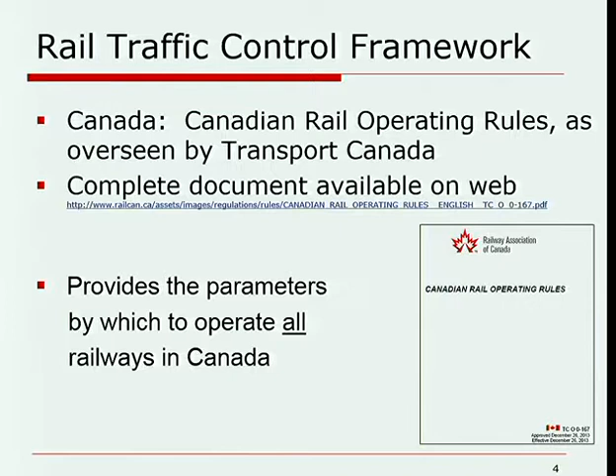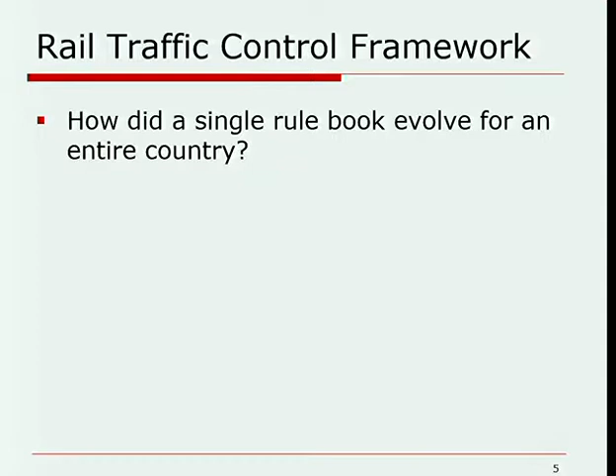So in the U.S., of course, things are very different. So you might be asking, well, how on earth did we ever get to the point where we were organized enough to have a single rule book for an entire country? And that's a valid question.

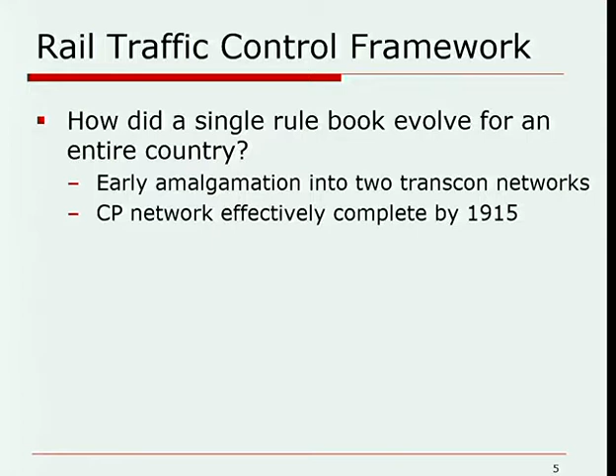And a lot of it is rooted in history, because in Canada, we had a very early amalgamation into two major railroad companies and an assortment of very small associated, well, we would call them short lines today. So we had two transcontinental networks very early in the 20th century. The CP network, the Canadian Pacific, was basically complete by 1915. The CN was created from various bankrupt railroads by the government in 1924.

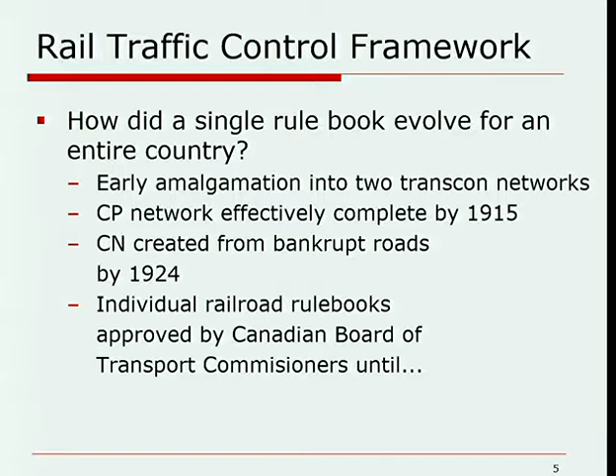At that stage, there were individual railway rule books, but they were all approved by government, the Government of Canada, through the Board of Transport Commissioners. Until 1962, when we had our first rule book that incorporated everything for all railroad companies, and they were actually even listed on the first page behind the title page.

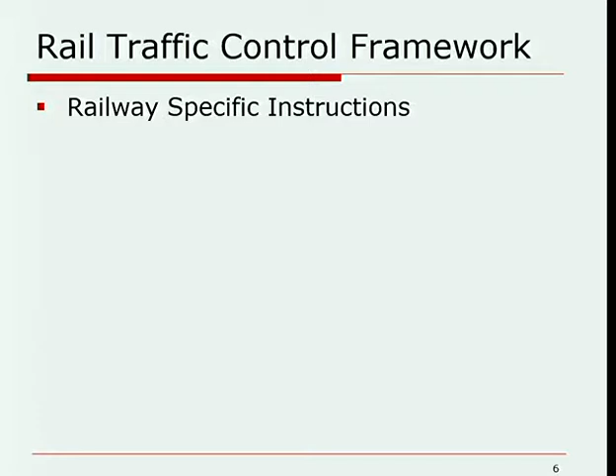So in 1962, the Uniform Code of Operating Rules basically condensed everybody's rule book, which at that point basically all looked the same anyways, into this one document. And it has since evolved from that time, changed names in the 1990s to the Canadian Rail Operating Rules. We do, however, have the provision to do railway-specific instructions above and beyond the rule book.

For example, at CN, we have our document, which is Canadian Rail Operating Rules, and that's the title page from it, but within that rule book, anything that we have added as special instruction makes a rule even more restrictive. We can make things more restrictive. We can't make them less restrictive.

But in the CN rule book version, we have it in blue text to specifically highlight where there's different areas. This company-tailored rule book also excludes rules that do not apply on certain railroads' territories. For example, in CN, we have no automatic block signal territory anymore, so we don't include that in our rule book.

Yes, Dr. Barkett. Could you go back to the previous slide for a second? And if you're going to get to this later, just hold off. But I think what you just said was that the Uniform Code of Operating Rules was adopted in 1962, largely derived from the two big transcon railroads. Yeah. But you also said they were essentially the same anyway. Why were they? Because the analogy in the United States would be that we don't have two different big railroads with identical rule books. So there must have been something between '24 and '62 that led them to converge.

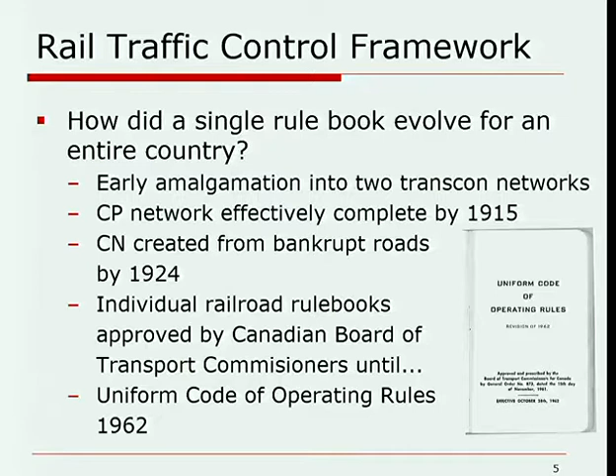So, back to railway-specific instructions: the company-tailored rule book, and, of course, our timetable, which includes other specific instructions for operation on any particular line of track that's out there, plus other special instructions that may apply only to a certain territory. In Canada, every mainline segment of track is referred to as a subdivision. And then there's also reference to yards and terminals. The timetable also clearly identifies the method of control and who oversees the application of those control rules.

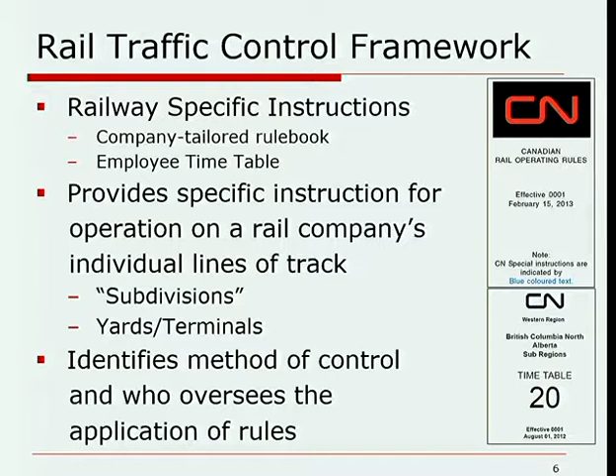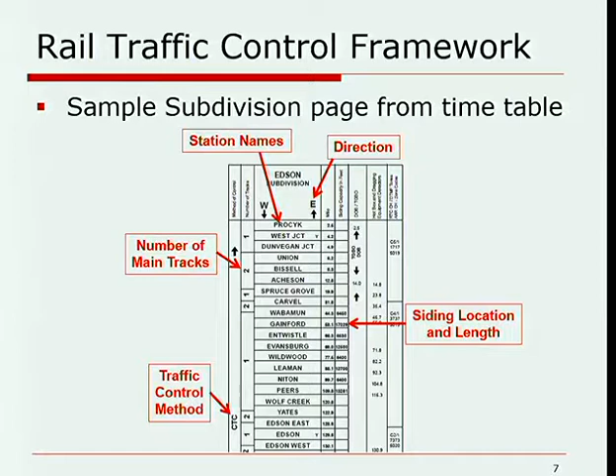And of course, it specifically identifies the number of main tracks in service between station locations, and siding location and length associated with the station name. When we say siding here, these are timetable designated sidings that are used for passing and meeting of trains. And they have to be associated with a station name in order to execute proper control.

So we'll take a bit of a step back here. We'll start out with our basic control systems for non-main track.

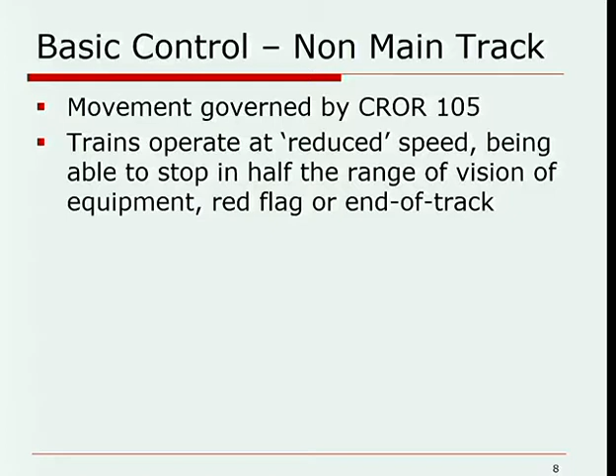Effectively, there is no control rule. What happens in Canada is movement and speed is governed by Rule 105. And in this territory, trains will operate at reduced speed. They have to stop within half the range of vision of equipment, or a red flag, or the end of track, obviously. Typical yard operation there, non-main track situation.

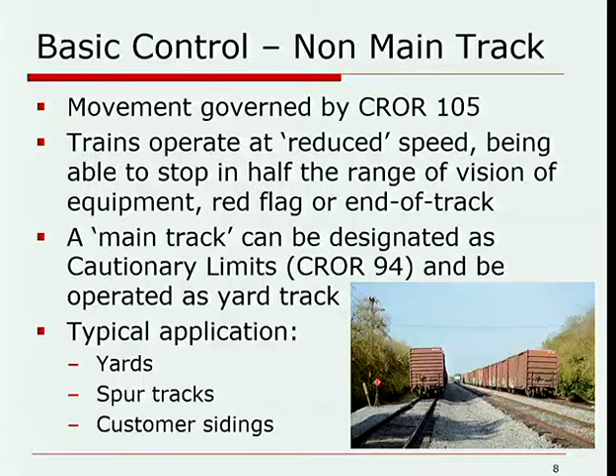There are a couple of provisions where you can designate a main track as being not under RTC control, RTC being rail traffic control, the person who oversees the operation. There's two ways of doing it. One of them is to install what we call cautionary limits, which is prescribed by Rule 94. It basically just turns the main track into a yard track. And a typical application, like I said, yards, all our spur tracks and customer sidings, ancillary tracks would all be operated under Rule 105.

In Canada, we have very specific rules about how to identify what is non-main track territory. The quickest way, besides knowing your territory: all our switch targets, when lined in the reverse position, will have a yellow target displayed. And it used to be a prescribed shape as well, but things have evolved and that's gotten a little looser over time. Here, this is a photograph on the Arnaud Railway where they use a yellow chevron there to sort of indicate you're going to the left at this particular turnout. But the yellow target is a clear indication that you're not on a main track.

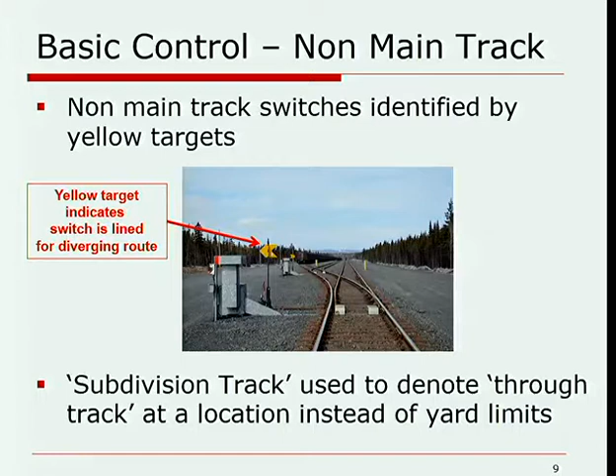On CN, we use what we call Subdivision Track to designate what is the through track at a particular station instead of using a yard limit or a cautionary limit application. And that will show up in the timetable as well. As I said before, the rail traffic controller, who we almost always call the RTC, he or she supervises and directs all traffic, issues all authorities, pushes all the buttons, makes things happen.

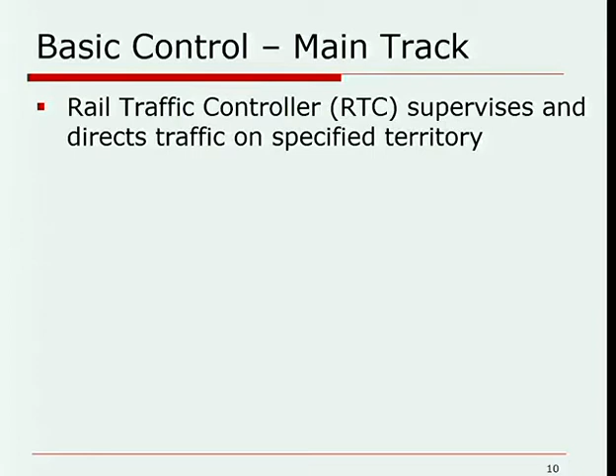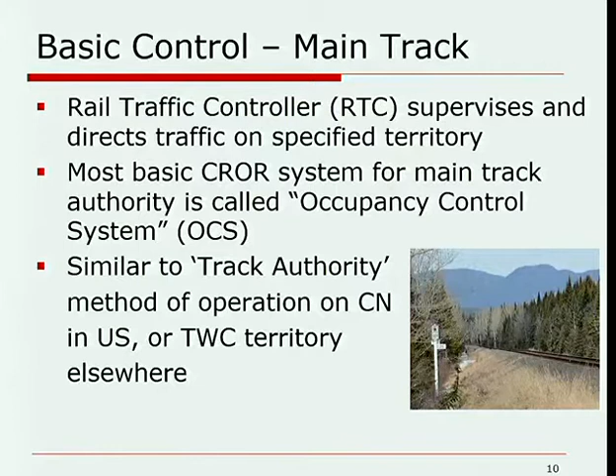It's a very flexible system. It doesn't require specific blocks. You can use whatever length of track you need in order to execute whatever movement you want. You're not giving out, like a direct traffic control system, specified blocks.

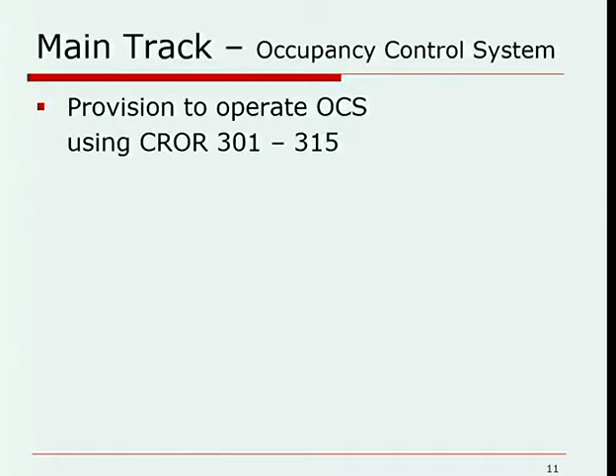OCS is governed by rules 301 to 315, and we have a nice pad that everyone is issued, and if you're a CN employee, you can actually pull it off the Operating Practices website and print as many as you want. This is the formal operating document that gets filled in to occupy the main track, do work, or move somewhere.

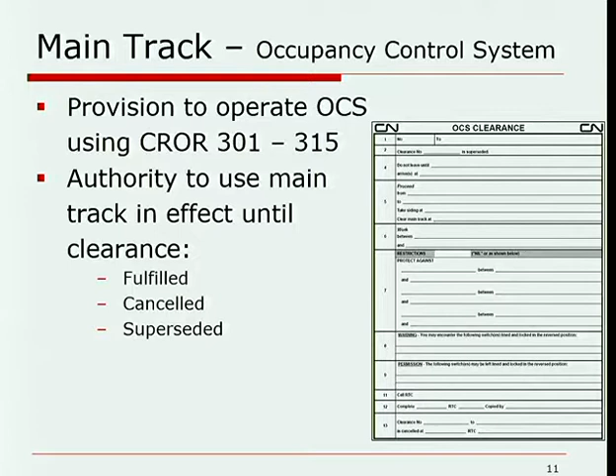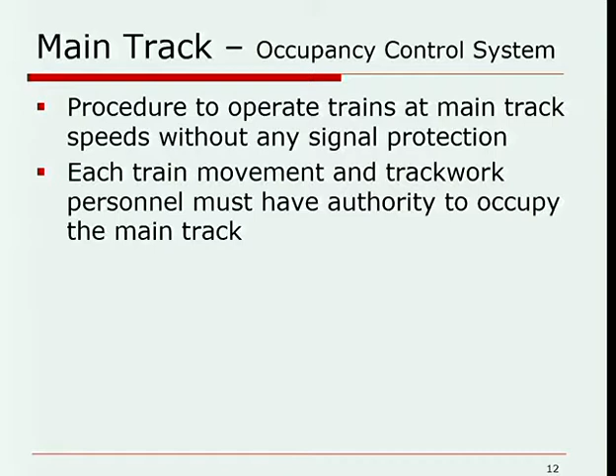We call it a clearance, and the authority to use that clearance is in effect until what we call fulfilled, which means you get to your final terminal and have exited the main line, it's canceled somewhere en route, you clear up onto a track that's not the main track, or it is superseded by some new clearance to move elsewhere. It's our procedure that we can use to operate at main track speeds without signal protection. And before anyone can go out there, obviously they need to copy a clearance and have authority to occupy.

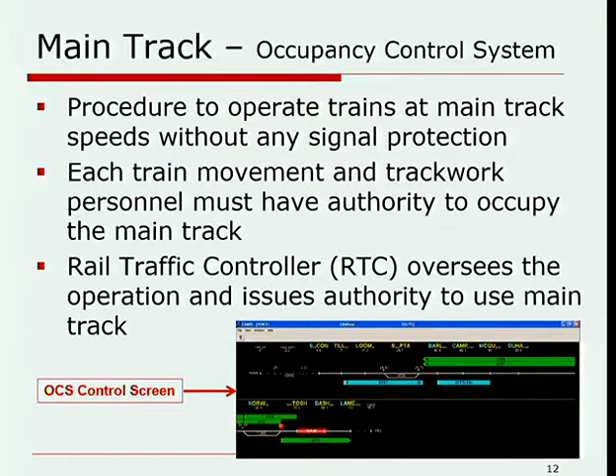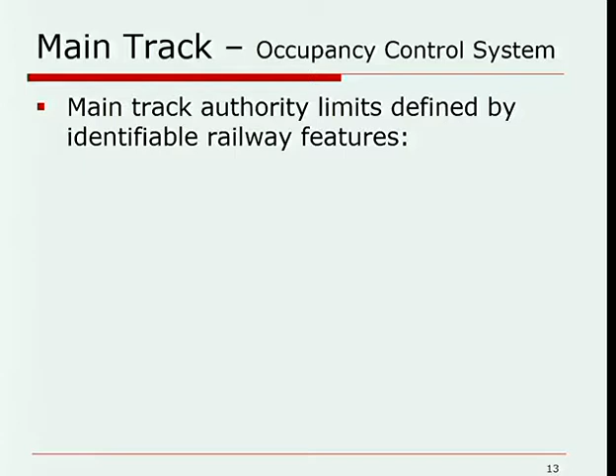In terms of the OCS system, in order to identify where you can go from and to, the limits are strictly defined by identifiable features. Besides the station name signs, we'll get to that in a moment, one of the key ones is we can use mileposts.

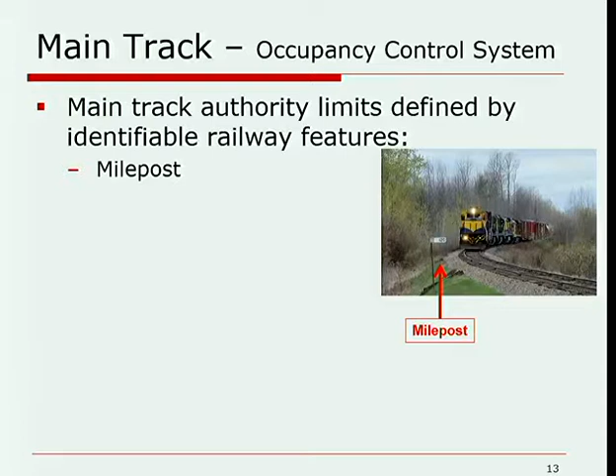Obviously, they better be pretty prominent and easy to see by the train crew. They can't be some mile marker that's hanging off a tree or something like that. Station sign is also very common. It has to be very prominent. Most of them are posted right next to the track, like in that photo there. We also use marked turnouts, ends of sidings, junction switches, etc., to designate limits of authority as well.

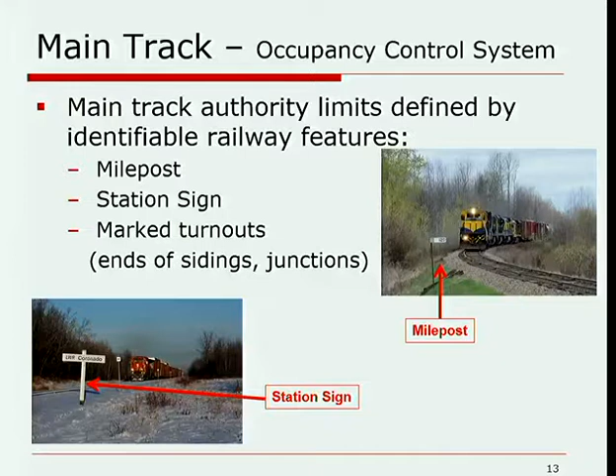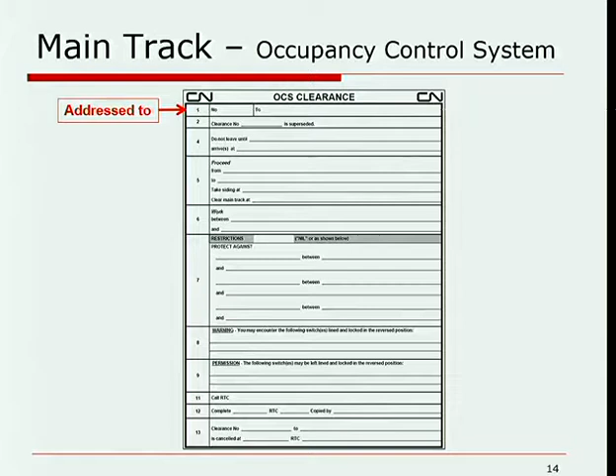So just a quick breeze through here of what the OCS clearance pad has on it. It has an address section, obviously, to give direction to who's allowed to go out on the track. There's a box for instructions to wait at a point, if necessary, before executing the instruction to proceed.

There's a box in here that specifically designates what direction you may operate in, and that authority gives you direction to move from and to in a single direction only, with a couple of little minor exceptions, but this only allows for movement in one direction. There's also the provision for bidirectional authority by using a work authority, and you can move back and forth at will once you have that.

Then there's information about other authorities that may be in effect within your limits. We do allow you authorization through, say, working limits, but you have to have information who to contact to get through those working limits for obvious reasons.

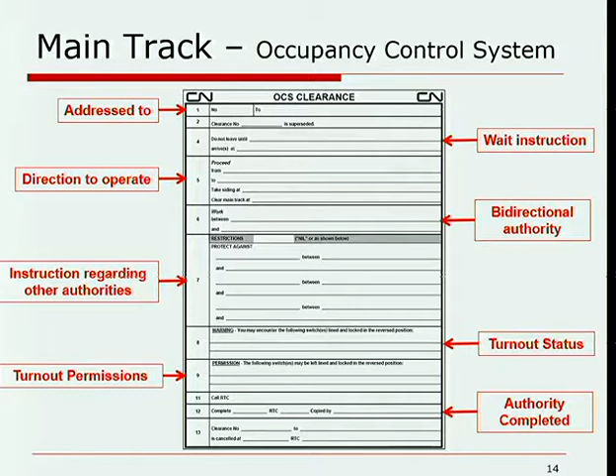Information concerning turnouts that may have been left in the reverse position because of other movements. We do allow in Canada turnouts to be left in reverse position as long as authority has been granted by the rail traffic controller. And that is granted by the next box down below here. And then finally, once the authority has been copied and repeated correctly, it is completed with the boxes at the bottom. And then there's provision to cancel the authority if it's no longer needed anymore.

Turnouts in OCS territory are generally always manually operated. There's a few instances out there where we have push button or radio control, such as this location in the photo on the Arnaud Railway, and they look a little bit more high-tech than just a regular switch stand.

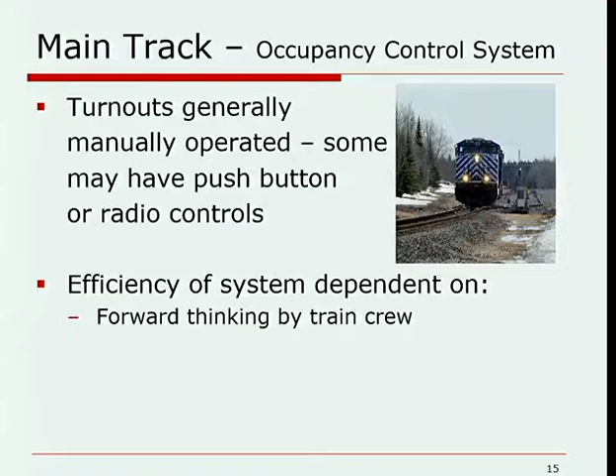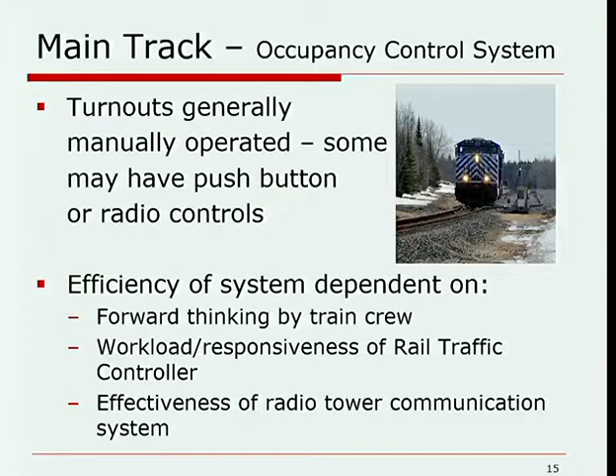And much like written authority systems in the U.S., the efficiency of our OCS is totally dependent on forward thinking by a train crew or the RTC to get manual authorities in time to keep moving. The workload and responsiveness of the RTC, that's fairly obvious. And the effectiveness of radio tower communication. At this point in time, once a train gets out of a terminal, the only way they have to communicate with the RTC is via radio. They don't have a data radio system or anything to electronically distribute clearances yet.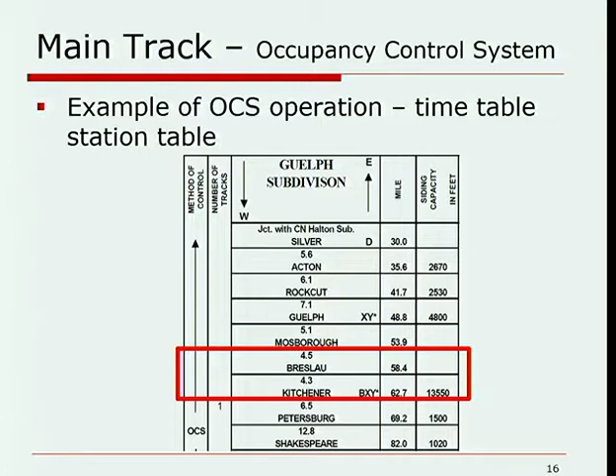So just a quick example of an OCS operation is a subdivision that used to be part of the CN network in Ontario. This would be what you would see on an OCS subdivision page. OCS clearly marked as the method of control on the left there, and I'm just going to show you how this would look on a track plan here using the segment of track between these two locations, Breslau and Kitchener, which used to be right down the street from where I went to university.

I didn't point it out before on the previous slide, but Kitchener has a designated passing siding, and it showed in the timetable 13,550 feet. And that's a place where you can direct trains to take or leave siding for meet purposes. The track at Breslau, although it looks like a siding, did not have a siding measurement shown in the timetable. And as such, it's just considered to be an other track, non-main track.

And it isn't something that you can use in an authority necessarily to use for a meet or pass location, although there are ways of using it for other things. But that track does not need to be kept clear of equipment or anything, unlike the designated siding.

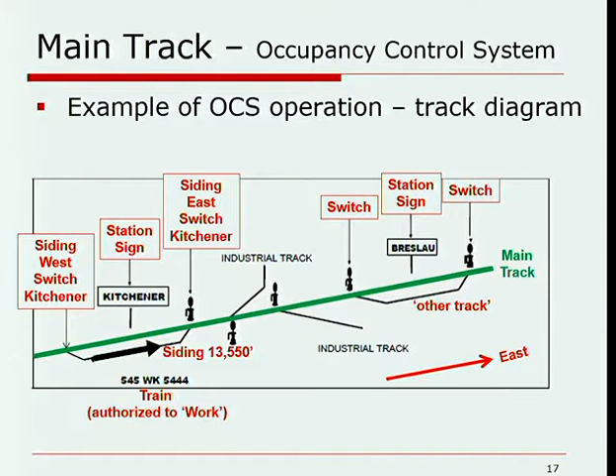And the little train showing the black arrow in the siding, the way it's been written there, 545 WK, which means work. 5444 is a train that would have some authority to work by OCS clearance. And that's basically how an OCS segment of track would look in plan view, and what you could use to dispatch it. Now we'll move on to signal overlay.

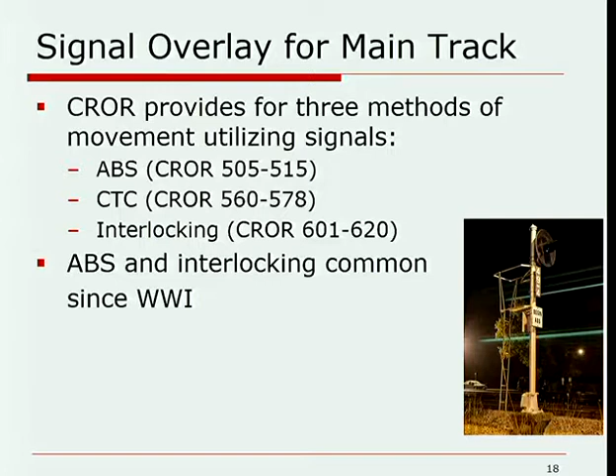In the Canadian operating rules, we've got three main methods for controlling movement using signals, and that's automatic block signals, which is rules 505 to 515, and CTC, of course, which is much more popular, which is rules 560 to 578, and then interlocking for more complicated or movable bridge type situations with their own set of rules. In Canada, ABS and interlocking, much like in the United States, basically evolved over the same period, starting from around World War I or so. CTC first came to Canada in the early 1920s, but the real significant installations didn't show up until the World War II era.

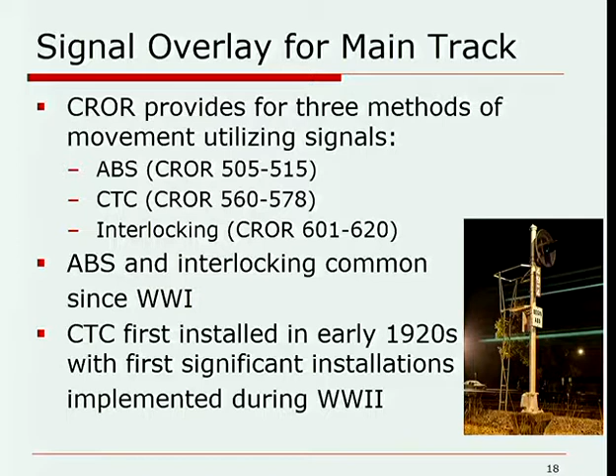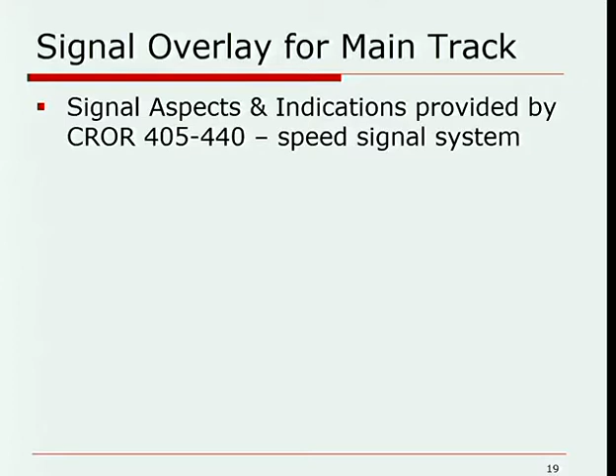On the main track, under any of those signalized methods of control, the signal aspects and indications are provided by another very specific set of rules. And this is kind of a big difference between Canada and the US. We use only one set of signal rules, aspects and indications. And they're all there in that chart. It's based on the speed signaling system. So everything, except for things such as the clear signal, which means proceed, and the stop signal, which means stop, and restricting, the rest of them, the definition all circulates around speed. It's a speed to another speed. And we use a combination of colors to convey that information.

In Canada, we also use a number of letter markers on the signal mast in order to upgrade certain indications. For example, limited speed signal indications can be developed by applying an L marker on the mast to a signal that displays medium speed indications. So a medium to clear indication could be upgraded to a limited to clear simply by the application of the letter L plate on the signal mast.

Question? Yes, there are. It is maybe difficult to see, but there are flashing indications there. It's a little bit difficult to see on the overhead here, but they are there.

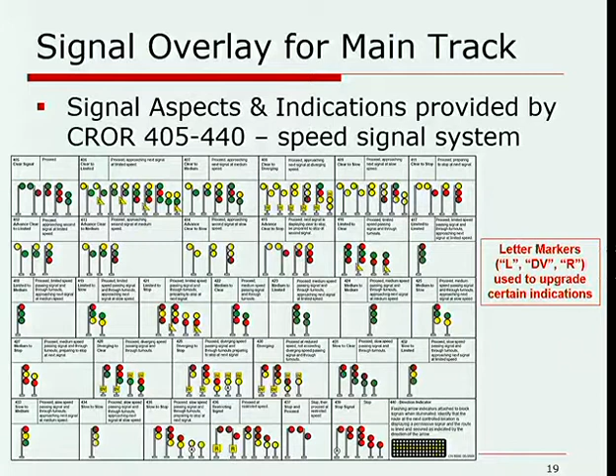And then in Canada, we also have a very interesting little device, Rule 440, down in the bottom right-hand corner, which is the direction indicator, which we use in certain applications approaching sidings where the siding is not under full CTC control, and that provides advance information to the train crew approaching that siding location that the route is lined into the siding, rather than coming up to the next signal prepared to stop, especially if it's a restricting signal application going into that siding.

Automatic block signals, like I said earlier, at CN we have basically eliminated the use of ABS. CP still has some significant segments of ABS on their territory: Western Canada between Edmonton and Red Deer, and then in Eastern Canada and Southern Ontario, west of Toronto, north of Toronto, and a double track operation going from Smiths Falls towards Montreal in the east. And there's really nothing new there. The application is basically identical to what has always been used in the United States.

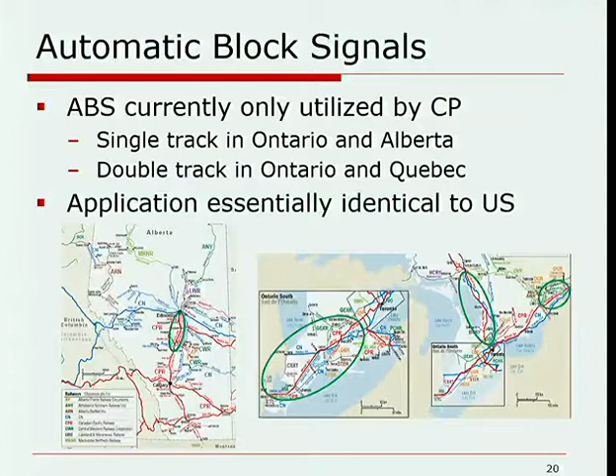Rules 505 to 515 govern its usage. And it is used in conjunction with the OCS rules. The ABS, of course, only provides information concerning broken rail protection and following and head-on train protection. OCS is your authority to actually occupy the main track and move somewhere.

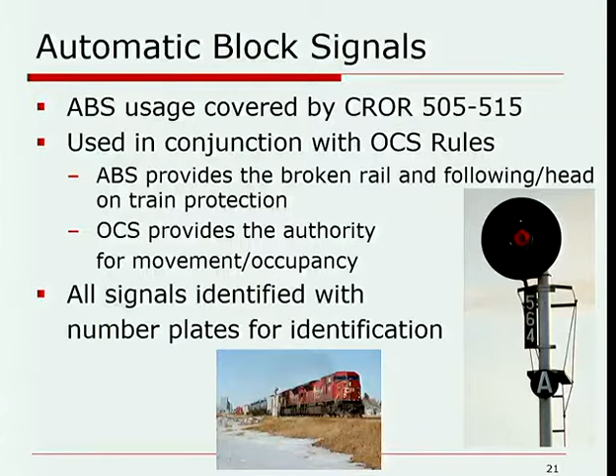And in ABS territory, regardless of signal type, all signals are identified with number plates specifically for identification purposes in documentation, including the absolute signals at the end of a siding location that govern the movement to the next station, which is different than in the United States application.

CTC in Canada, basically we followed the experiences of the United States roads and started getting into CTC from the 1920s onward. CP put the first real substantial installation into service out in Medicine Hat, Alberta, and it governed movements on a 6-mile, 1% hill that had helper operation and had a lot of back and forth movement, and which previously had been dispatched using an electric staff type system.

And basically, just a familiar story, they needed more capacity, and they needed to get something that was more robust to move more trains over this segment of track. And all it included was a select number of controlled signals at either station and 2 power turnouts.

CN was the first railroad to commission a long-distance single-track CTC application between Moncton and Halifax in eastern Canada. And basically that was installed to help with the efforts during World War II because we had a severe problem with trying to get ships out of the harbors at Montreal and Quebec City. German U-boats were actually coming into the St. Lawrence River and torpedoing ships. So Halifax was a much more easily defendable harbor area.

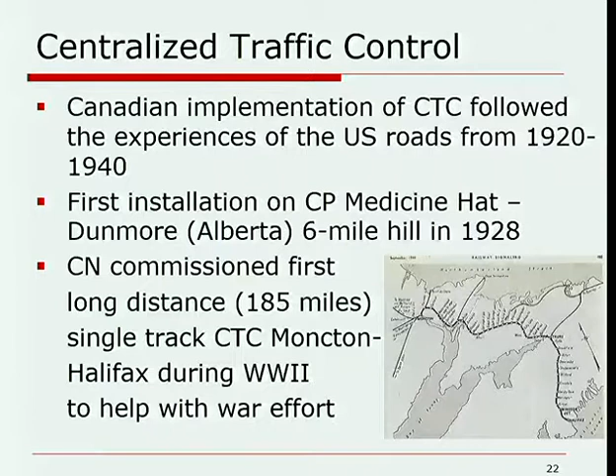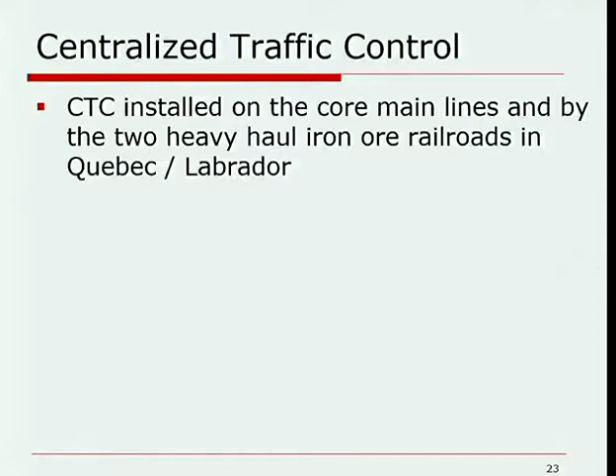In Canada, based on the success of that application, through the 1950s and in the 1960s, CTC was basically installed very rapidly on all the core main lines in Canada, and the two heavy iron ore railroads that opened up in the late 1950s in Quebec and Labrador in eastern Canada.

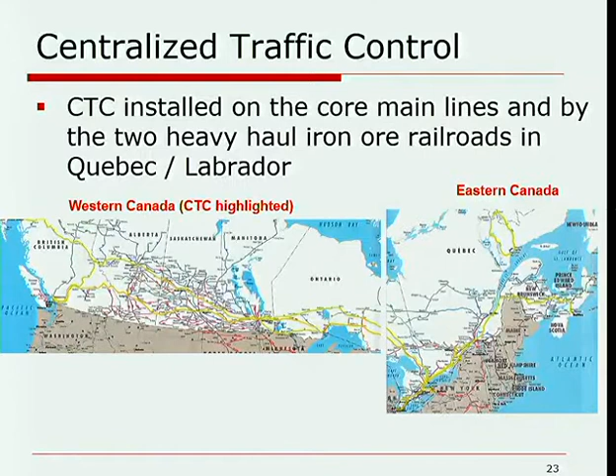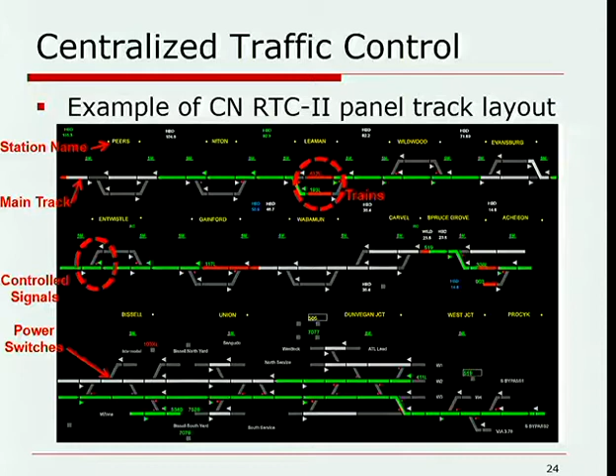Anything that's shown in here as what looks like a switch is a switch that can be controlled by the RTC and would have a power or dual control switch machine. And then the trains basically show up as your red lines as track occupancies. Nothing really fantastic or much different than US displays.

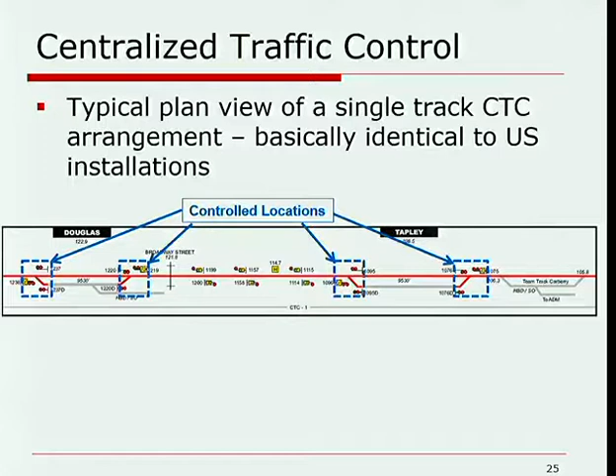Track plan view of a single track CTC operation. This would be a segment on CP main line. It's basically identical to US installations today. Historically, there were a couple of little differences, but over the last 20 to 30 years, basically everything has started to look effectively identical, with a series of controlled locations marking the ends of siding locations, and then the application of intermediate signals in between.

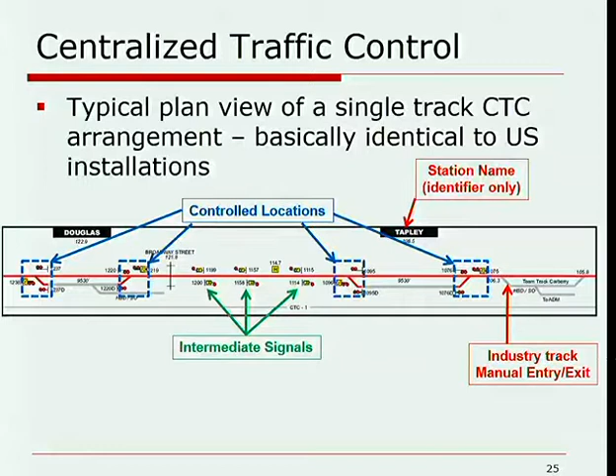And the station names are not quite as important in CTC as they are in OCS. They don't really convey specific operating authority. That's what the controlled signals are used to designate, not the station names. Station names are used as identification for signal features that are out there in the field. And then industry track, of course, would be back under what we discussed earlier, under Rule 105 authority.

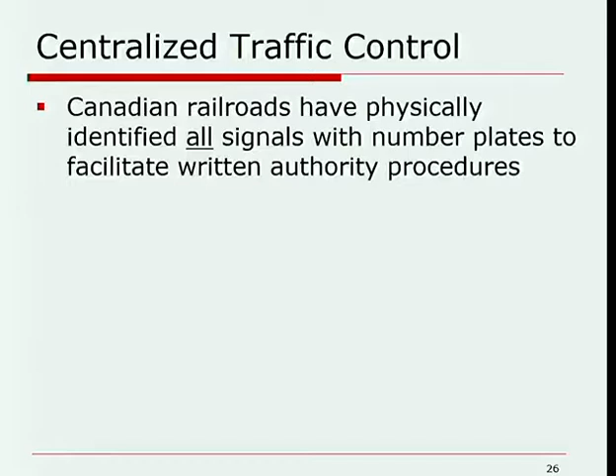And back to something that I talked about when we were discussing ABS. We have identified all of our signals in CTC with number plates, and that's to facilitate written authority procedures. This is a photograph of a location on the Quebec North Shore Labrador Railway with 3 controlled signals and 1 dual control switch. And the arrows there point to the 3 controlled signals. And you'll see that each one of them has a number plate on it.

And when a written authority is required to pass a signal at stop or to give maintenance-of-way authority between 2 locations, they use these number designations as that limit of authority instead of going through a big, long discussion and trying to describe what that location is.

Dr. Barkin. So I take it these are absolute signals. Yes, they are. So is there some other means by which a crew member knows or can distinguish between absolute and permissive signals? I mean, as you know, of course, in typical U.S., these would not have a number plate. Yeah, the difference in Canada, first off, anything that is a single head signal is a permissive signal. We have no absolute signals with only one signal head, unless it has an A marker on it. So that's one thing. Okay.

And then the second one is if we need an absolute signal or intermediate signal that needs two heads to display something, they are staggered, one on either side of the signal mast. So you get kind of a diagonal effect when you look at it. So even if they're color lights, they'll be staggered. Yes, they will be. Gotcha. And that's all demonstrated and shown in the signal aspect chart.

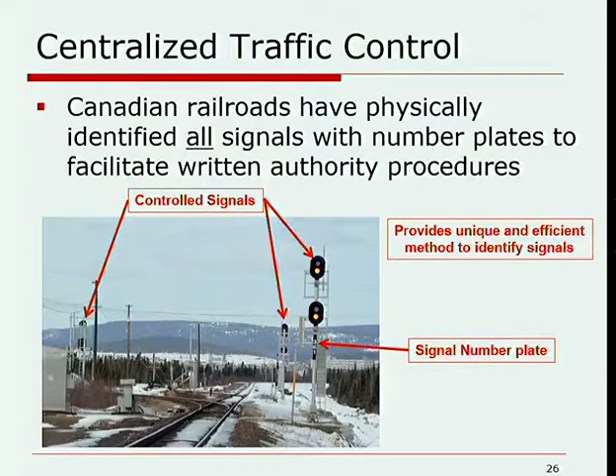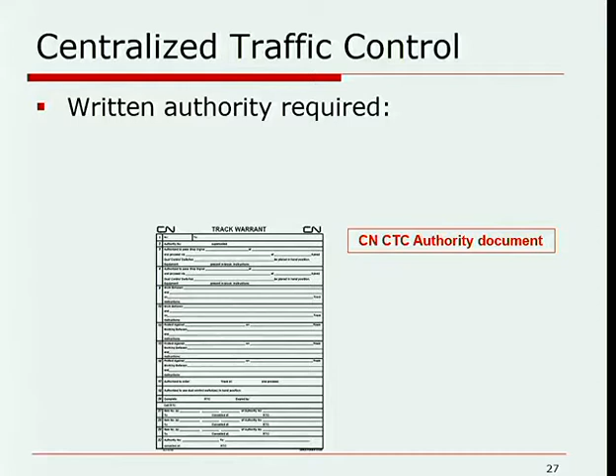Just like in OCS, every train crew has to carry around, and every engineering work group has to carry around a written authority pad. In CN, we call it the track warrant, which is interesting considering what track warrant means in the United States. It used to be called CTC authority form. This document is used by a rail traffic controller to give information to a train crew, for example, to pass a control signal that's displaying stop and cannot be cleared for some particular reason. That's governed very specifically by Rule 564.

This document can also be used to allow engineering forces or train crews to work between defined signals and take switches off power and operate them in hand throw as they see fit to do whatever they need to do. And this document is also used for permission to enter the main track from a hand-operated switch. It's a little bit different in Canada. We don't necessarily need an entering signal or an electric lock on every hand-throw turnout in CTC territory because of this provision that we use written authority to enter main track at hand-operated switches.

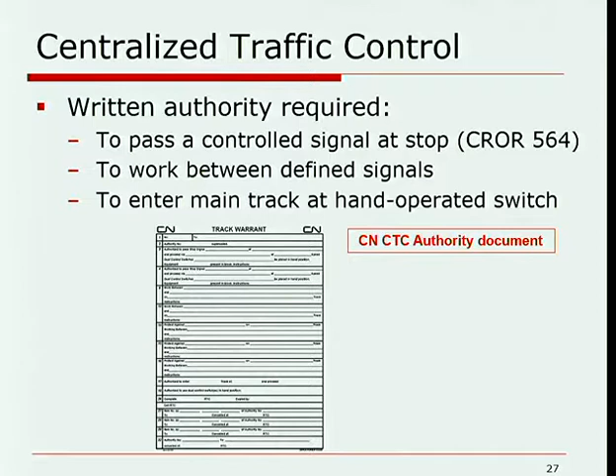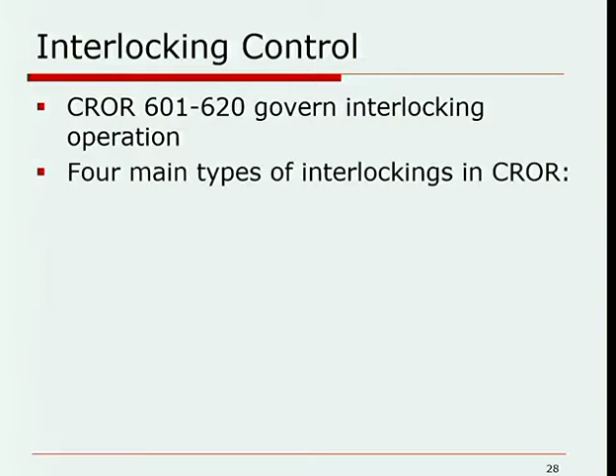Moving along, the next big group of control would be interlocking. And in Canada, that's under Rule 601 to 620. And we have four main types in Canada that are specifically identified in the rule book, and instructions are specifically written out about how to deal with each one of these. There's what they call a manual interlocking, and that does not mean a place where there's gates or stop signs. This is in there more as a placeholder right now, for a form of interlocking that we haven't thought about yet and may want to introduce. And it would only be governed by special instructions developed by the railroad and approved by Transport Canada.

But the other three are typical to what you would see even in the United States. The locally controlled style of interlocking, which means there's a tower nearby. Remotely controlled, which would mean the rail traffic controller from a remote location operates it. And then automatic, which is usually nowadays restricted to just simple diamond crossing locations.

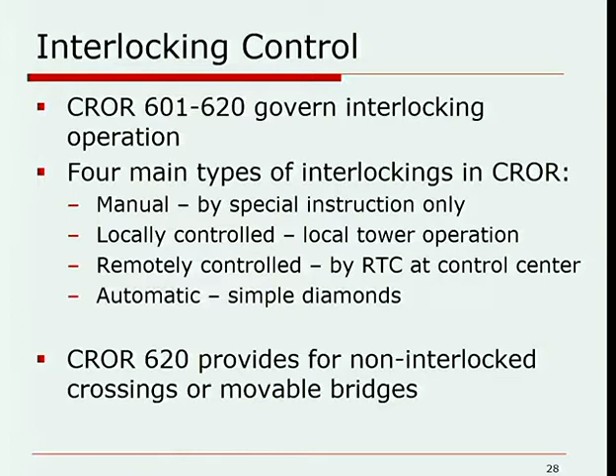Also governed under interlocking would be things like movable bridges. It doesn't necessarily mean that this is a diamond location or a major terminal. There's also a very specific rule. It's interesting that it falls under interlocking. But we have an interlocking rule for what we call non-interlocked crossings and movable bridges, which would be stop sign or gate or something like that.

In Canada, we've seen quite an evolution in interlocking control, very rapidly have moved away from the classical definition of the interlocking with the control tower and diamonds like this photo from around 1923 at West Toronto. At that time, it was locally controlled. By the time this particular location was retired just last year, it had been completely remoted and totally under the control of the Canadian Pacific RTC from various places, Toronto, Montreal, and then eventually Calgary, before it was retired and replaced by a fly-under for a new GO Transit project.

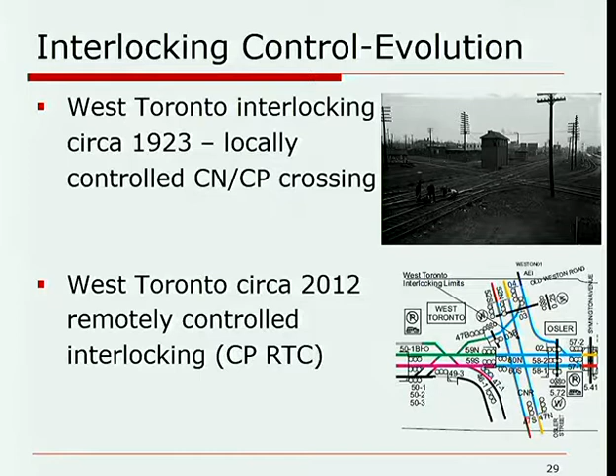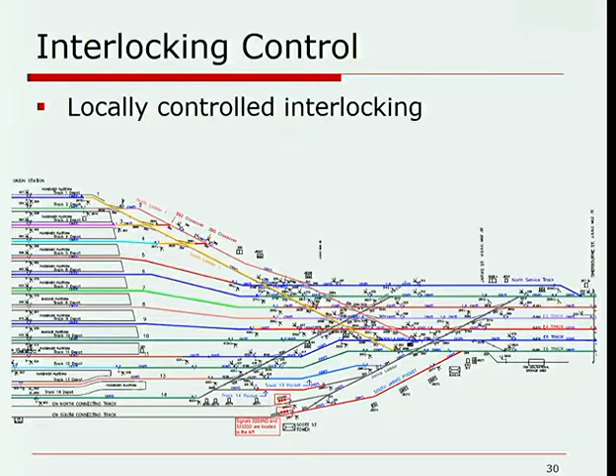But again, evolution in Canada has been much more rapid to eliminate the locally controlled locations than it has been in the United States. We're down to only a handful in the entire country, and basically most of those are in Toronto. This is one of the last ones here. This is a sample of the track diagram for Scott Street Tower, which is on the east side of Union Station in Toronto.

Anyone hazard a guess on just how many levers and controls? And Mr. Roma, you're not allowed to answer this one. I was going to say a lot. A lot? 120 from someone? They're very close, actually.

Well, this particular location was opened with the complete rebuild of the Toronto Union Station area. Opened in 1931 with 78 signal levers, 84 switch levers, and 192 levers in total. The length of this room, probably. Pretty much.

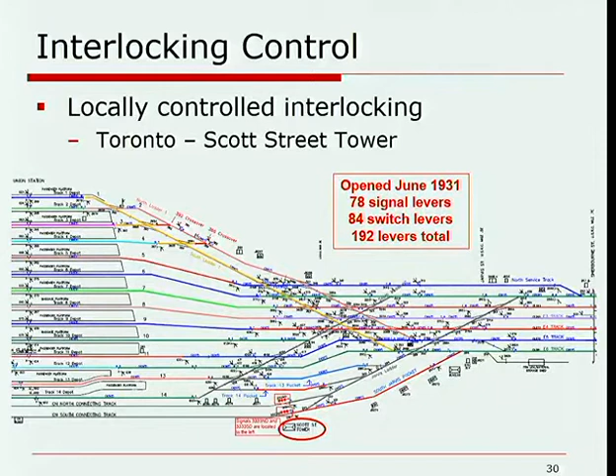However, even this location, and there's two others nearby in Toronto governing the Union Station Rail Corridor, are under plan right now to be eliminated by what we would now call a remotely controlled interlocking system as part of the GO Transit and Metrolinx expansion plans for the Union Station area. Yeah, the question was whether that project will rationalize or just transfer control. And in fact, if anything, there'll be even more track once they're finished there than there is now. But yeah, for the moment, the main thing is to transfer control to a more modern control system.

Future control systems are provided for in Canada, specifically in the CROR. There's a segment in the rule book that provides for what we call a special control system. And there's three little rules in the rule book, 351 to 353, which basically says they'll be governed by special instructions once we figure out what that's going to be. It may seem kind of ridiculous, but actually this little group of three rules has been in effect in various rule books since the UCOR in order to implement various new methods of control as they are developed and come into practice. And in fact, our occupancy control system, which at one time was called manual block system, was implemented using these three little rules roughly 40 years ago.

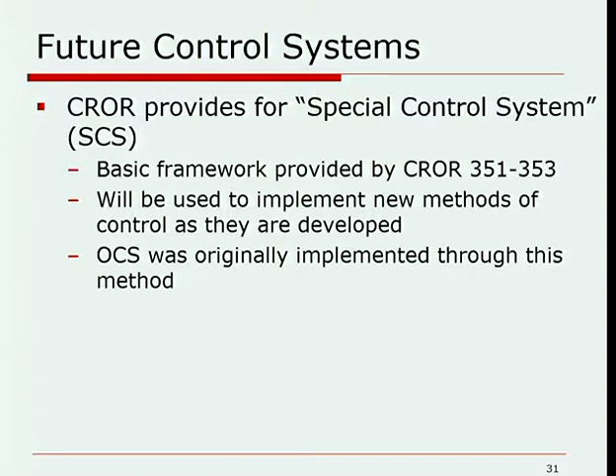So we do have in print at least a way to incorporate and start work on whatever our next control system is going to be going forward, which right now does not look to be PTC. There's currently in Canada no specific mandate or requirement to implement PTC, unlike in the United States. We've taken a bit of a wait and see methodology to see what happens with the United States application. And although there's been some incidents where the subject has come up, so far nobody has legislated any kind of rulings or mandates that say you must do this by X date.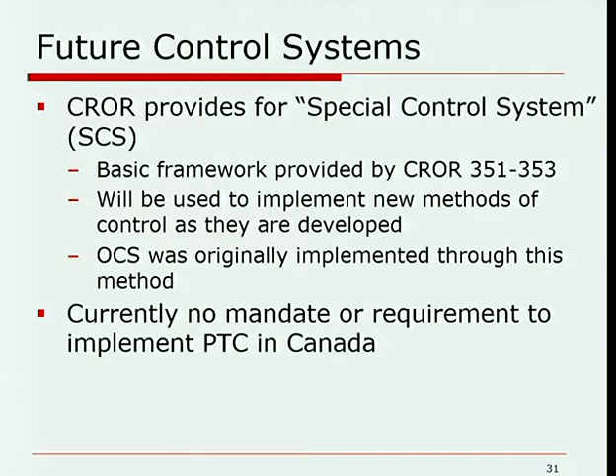So in conclusion, just to wrap up a few things here, we in Canada have continued to make a single rulebook methodology work, despite the fact that as we've moved on, CN has dropped certain methods of signal control like ABS, even though CP continues to use it. But even still, we've been able to handle that by CN using its tailor-made rule book and just not using those rules, as long as we're not going to apply that method of control. So we're able to make our single rule book work as we keep moving forward.

In terms of hardware, what we use in our control systems is basically identical to that in the United States. In my role in signal design, we specified products and equipment that was sourced from the U.S., basically. We have no signal manufacturers specific to Canada anymore in existence.

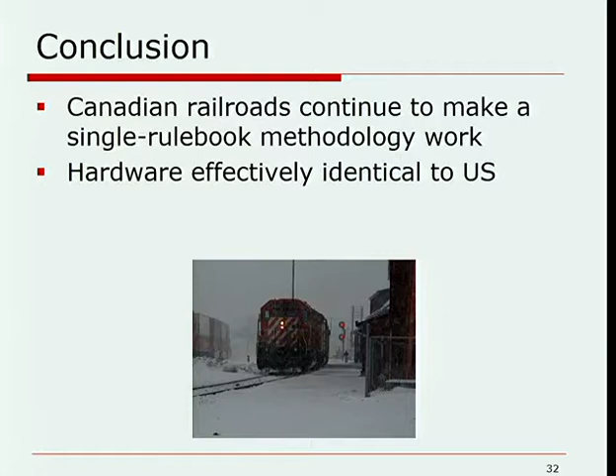And from what I've seen so far, the procedural differences for operating authorities and certain methods of control, think of the number plating on absolute signals, the need for written authority to pass stop signal indications, et cetera, are likely to remain in force.

It's almost impossible to institute a change that reduces the amount of safety or rule enforcement that's in the CROR. You can always add to it and make things more restrictive, but to get rid of certain things is almost unheard of. Things have changed over time. Certain things have been incorporated and amended over time, but certain applications are unlikely to ever change.

And if anything, maybe in the U.S. you will move to join some similarities that we possess up in Canada. And with... yeah.